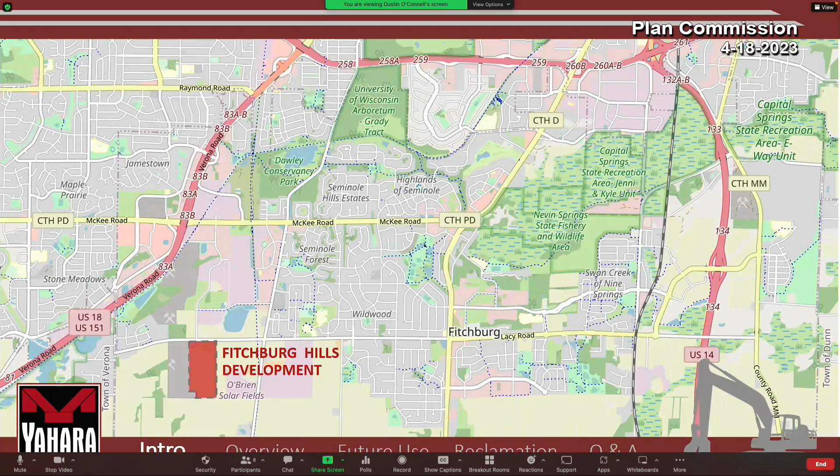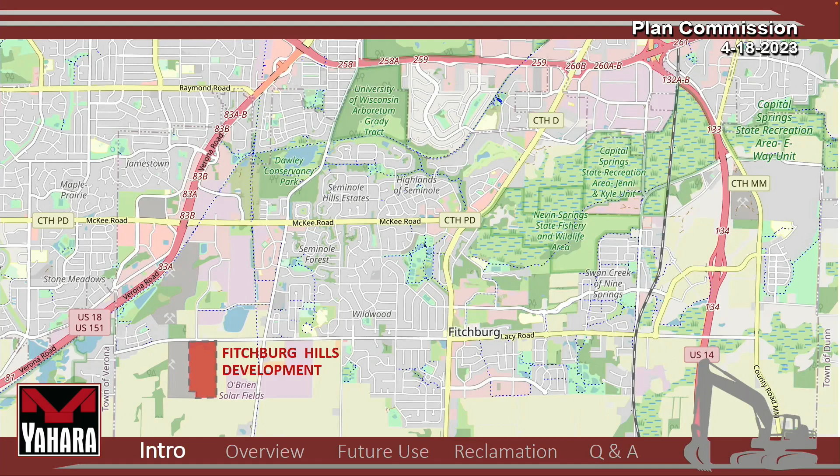This is the location of our site, Fitchburg Hills Development. It's next to the O'Brien Solar Fields, on the south side of Lacy Road, located at the intersection of Commerce Park Drive and Lacy Road, directly south of the Hop House. It's the old Richardson farm, consisting of just under 100 acres. It's currently zoned for agricultural row crops, the predominant use, and we purchased it in 2021.

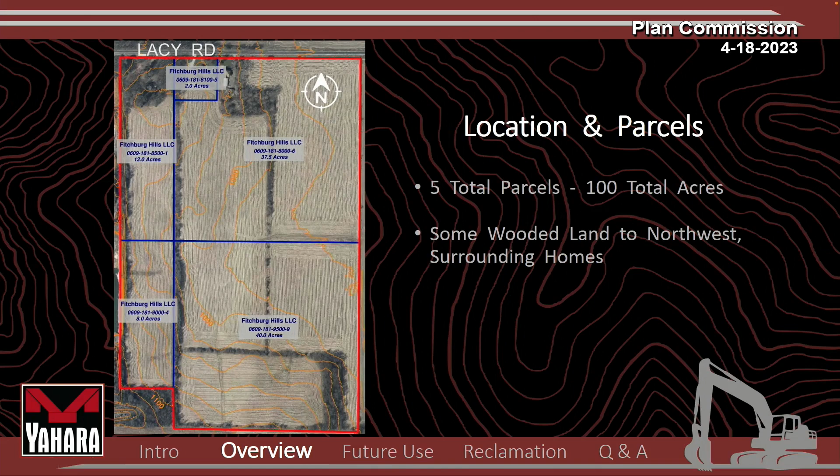Again, here are the 5 parcels that it includes. We're currently in the stages of putting our reclamation plan together, as we know the site is going to get developed in the near future. Fitchburg is updating their comprehensive plan for the South Stoner Prairie neighborhood, which includes this site.

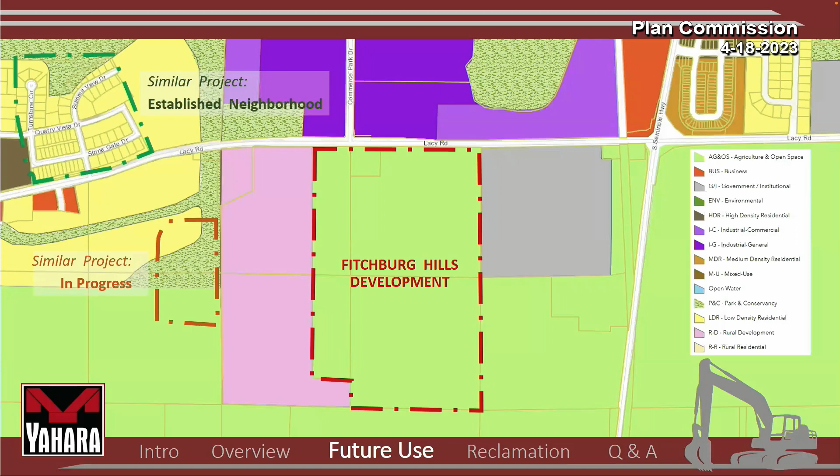When a development happens there, go to the next slide. Again, this is another slide of the site. We had to put a reclamation plan together for what we're going to do in the interim. This allows us to go in and start prepping the site, because the rock is going to have to be dealt with regardless of what happens here. This gives us an opportunity to remove the rock so the future development can move along.

This is an overview of the steps of our process for processing rock. We've done our investigations, we've got our plans drawn up, and right now we're in the process of getting our conditional use permit. Once that happens, our operation will be clearing and grubbing it, putting in erosion control, stripping it, drilling and blasting to prepare the rock. We'll process the rock, crush it and screen it. When we're done, we'll close it out, clean up the site, recycle it, reclaim it, and put it back to agricultural vegetation.

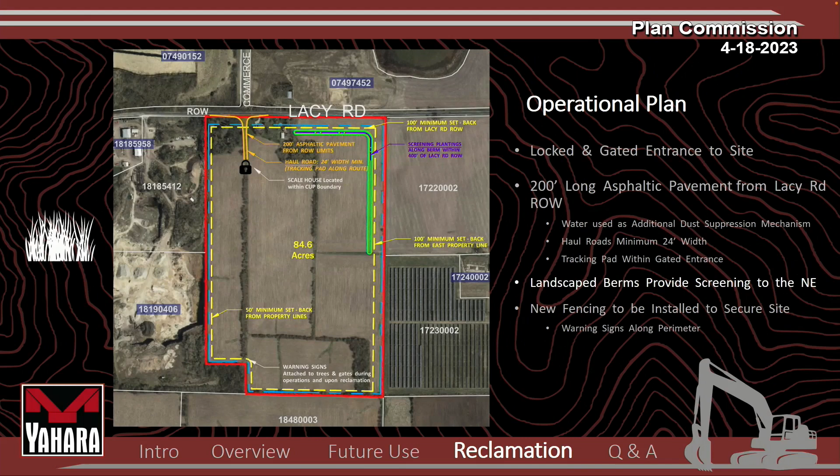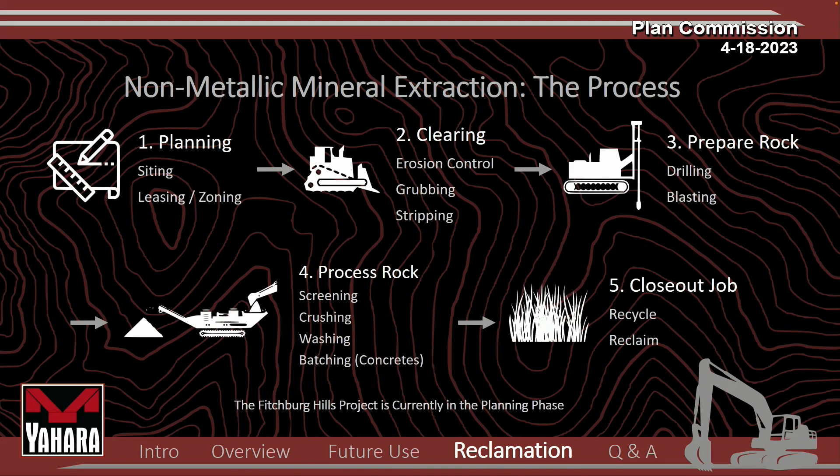Can I ask a question real quick? Sure. On one of your last slides, condition number 17 says no washing of materials, recycling materials, asphalt batching, concrete production, and concrete mixing shall be performed on site. Are you saying you have an intention to do that on this site? No. We have no intentions of washing or batching or producing asphalt, anything like that. We're just producing rock. Just wanted to make sure we weren't in conflict there. Thank you. Yep.

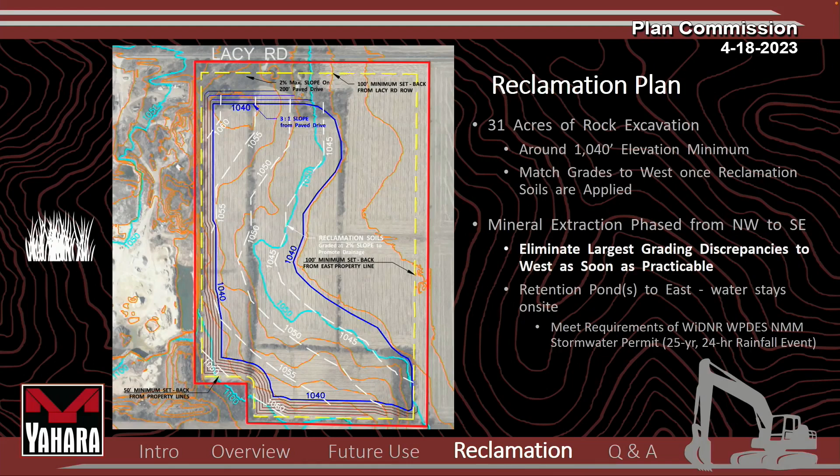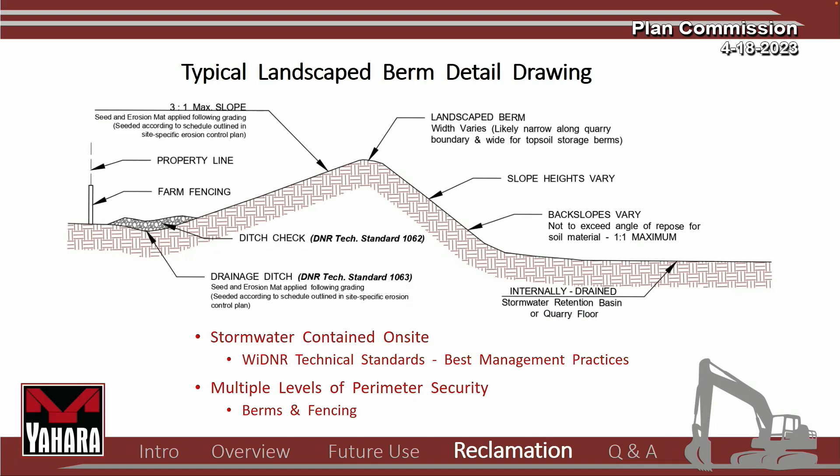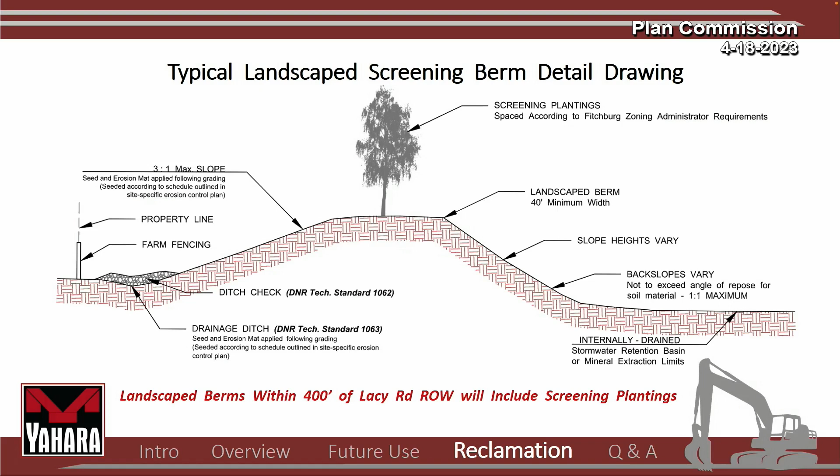Here is what our berms are going to look like: fence, security fence, ditch check, seeded matted berm. This is a slide of what the typical landscape screening berm will look like. The only difference is it's going to have some trees on it, and that will be on the north and east side, approximately half the distance on the east side. Here's a cross-section of our high wall, the safety fence, and the berm.

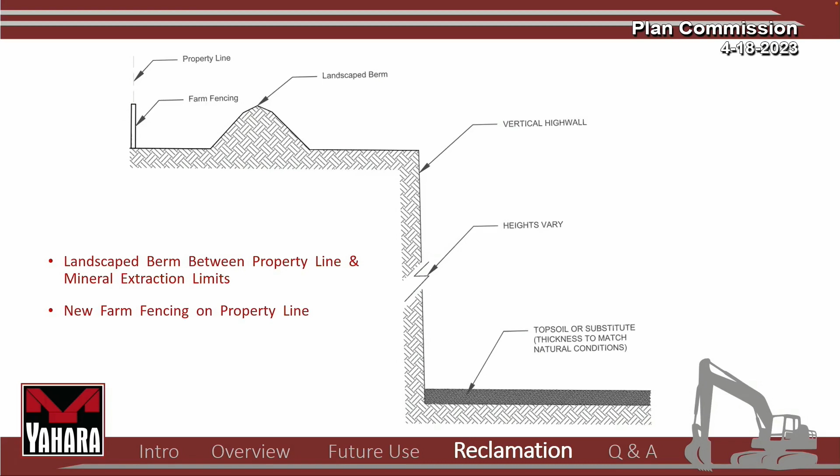Going forward, the only thing we have left to do is, if we get your approval tonight, submit our completed reclamation plan to Dane County, and they have 30 to 90 days to approve that.

In the meantime, for stormwater management we have to apply for a permit from the Department of Natural Resources. That plan will show where all the water's going to be caught in the ponds, and it will be determined that it's an internally drained site. They will monitor that and issue us that permit, and you guys will get a copy of it.

This is a scenario of the haul routes when we first looked at this. The green going to the west and up Fitchrona Road is on there for visual purposes only—we've never intended to go that route. The two routes we looked at were going north on Commerce and east on Lacy.

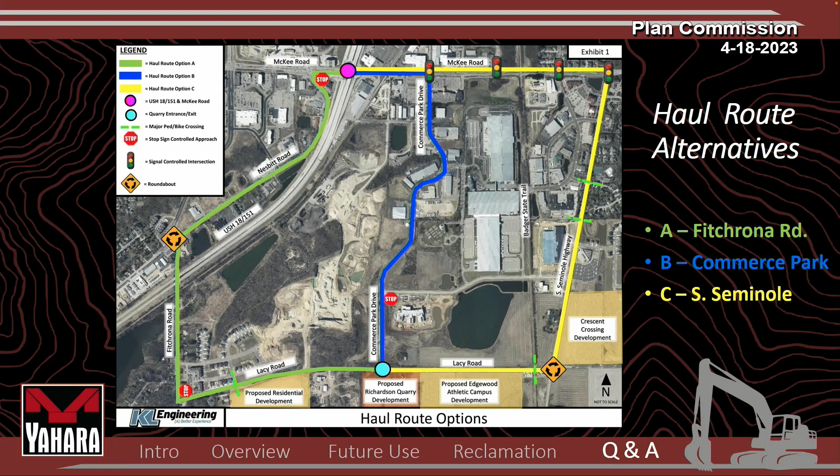In discussion tonight with the Rural and Ag Affairs Committee, it was brought up that they would like to possibly see a four-corner stop, a four-way stop, so we would continue north on Commerce Drive all the way to PD, and we're okay with that. That was an option brought up tonight. This is some of the criteria used when the traffic routes were looked at and decided upon.

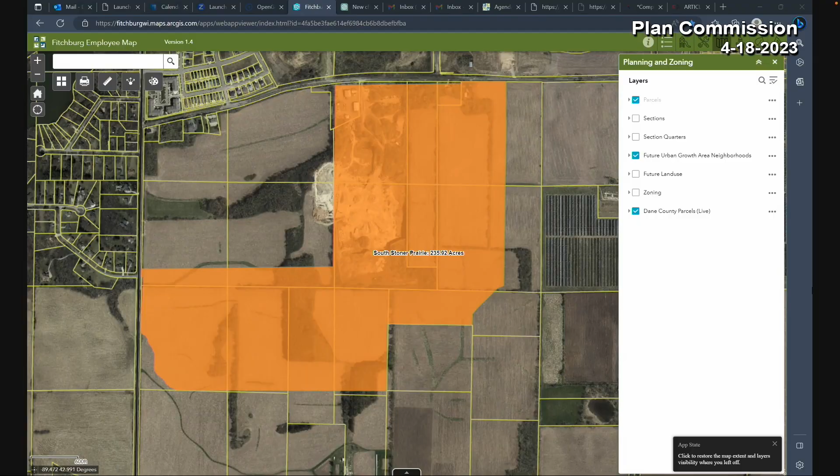But planning staff have initiated the South Stoner Neighborhood Plan. The area in that orangey color, might look a little yellow to some of you, is the South Stoner Neighborhood Plan that staff has initiated the process to begin. We have selected a consultant and will go into contract in the next month or month and a half, we hope, and then start the neighborhood planning process within 2 or 3 months.

So while the future land use currently on this site is agriculture and open space, at the completion of the South Stoner Neighborhood Plan this will have new land uses, and this will be the first step for urban development throughout this orange area. To orient you, Fitchburg Road is here, Lacy is up here, and the parcels for the proposed quarry are these parcels, if you can follow my cursor.

So these parcels, where this current application for conditional use is slated for urban development, at this point we cannot tell you what types of urban development it will be. We can't say if it's going to be houses or industry or commercial. That will come out of the process of the neighborhood planning process we are embarking on, and I would expect it would take at least a year till we have that neighborhood plan ready for Plan Commission review and council review. So that's the first step I wanted to bring out for everyone.

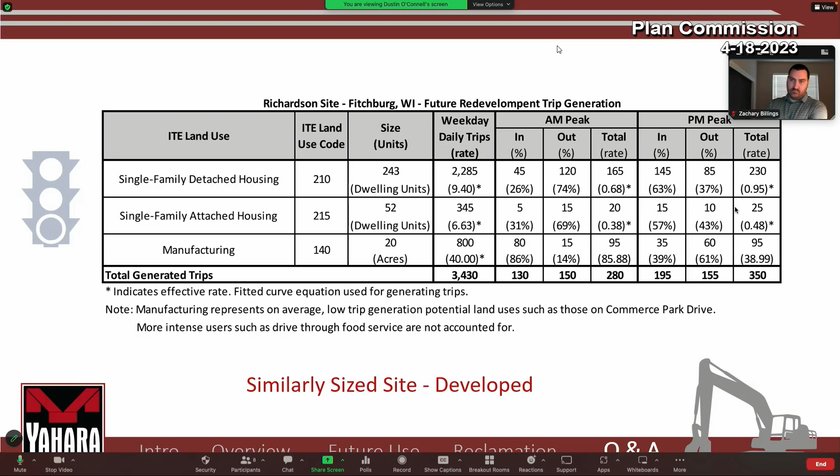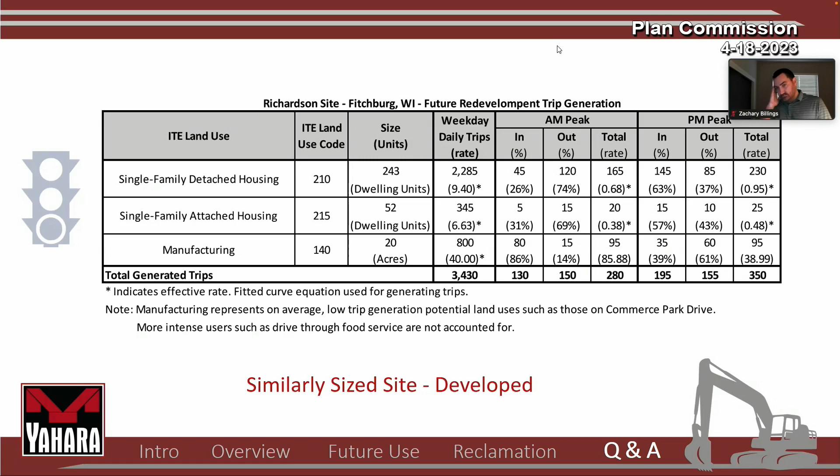As a follow-up, at what point would we expect the truck hauling to reach the level that generates the warrant criteria to put in a four-way stop? It quite frankly is far short of that. We did some forecasting of future development, assuming if it's mostly residential with some commercial, potentially along Lacy Road, that was shown to generate about 3,500 vehicles a day - at that level you'd look at a traffic signal. What the quarry is showing, with 150,000 tons per year production, was about 70 trucks per day, which on an hourly basis is less than 10 in an hour. Not insignificant, but far short of the levels traffic engineers would say meet the need for a four-way stop.

You would need, just kind of high level estimating, but you'd need probably 10 to 15 times more volume regularly using that intersection, either from Commerce Park or the driveway or both, than the quarry's going to generate to really necessitate putting stop signs up for Lacy Road.

And what point were the trucks, you have to prepare the site and build the berms, so would you potentially start hauling at the end of this calendar year, or would it be next year? What's the timeline for the trucks to actually be on Lacy Road? Probably late this fall. The construction's happening this summer.

I have a few more questions, but on different topics. Any other questions? No? I just have a couple things about the geological report, just a few questions about groundwater and stormwater.

So the St. Peter sandstone is underneath, and you're looking at the dolomite layer, that's what you're trying to mine. You say the layers are pretty flat in the area, so you have a sense of how deep you get to go. But at the 1,040 layer, looking at your cross-section, it looks like the sandstone actually starts at 1,060.

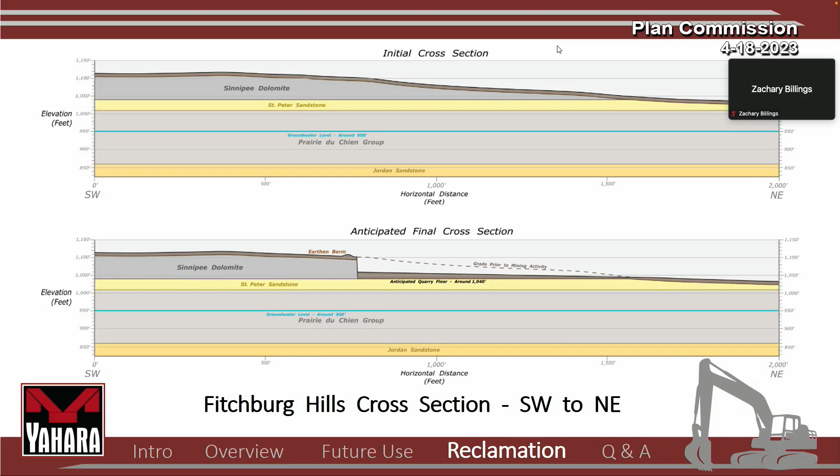Obviously the water table is lower, about 50 feet lower, but the actual sandstone layer starts about 20 feet below your minimum. In terms of protecting the groundwater, the report says it's 90 feet of depth before you hit the groundwater, but in reality it's 20 feet of depth before you hit the sandstone, and that's the risk, in my mind, of groundwater contamination. So I'm curious about how you manage that.

Or potential groundwater contamination. Can you come to the microphone? Dustin, you want to take care of that? Yeah, sure. All right, so I definitely understand the concern there.

The big thing to emphasize, and we've already touched on it a little bit, is there will be no washing going on at the site, and there will be no high-capacity wells. The types of activities that would influence the groundwater table would be drawing from the groundwater table with a high-capacity well, or washing materials on site and depositing those in a pond that would have water infiltrate once you have processed water. So again, just to reassure everyone, those activities aren't taking place, and those are the activities that would influence the groundwater table.

So the activities are purely mechanical in nature. You're crushing the rock, you're putting it on the trucks. Are there chemicals? There has to be. No, there's no water incorporated at all, other than the storm water that would be falling on the material, which will remain on site. There's no process-generated wastewaters associated with these activities for this proposed project.

And then the other question I had was about dust and sediment in general. I know it mentioned in the report, in the materials, that you do some street cleaning if there's any sediment at the end of the day. You want to touch on that, Robin? I'm sorry, I didn't hear the question. So for erosion control, I saw on page 8 of your report, it said something to the effect of any sediment reaching the street will be cleaned up daily by street cleaning.

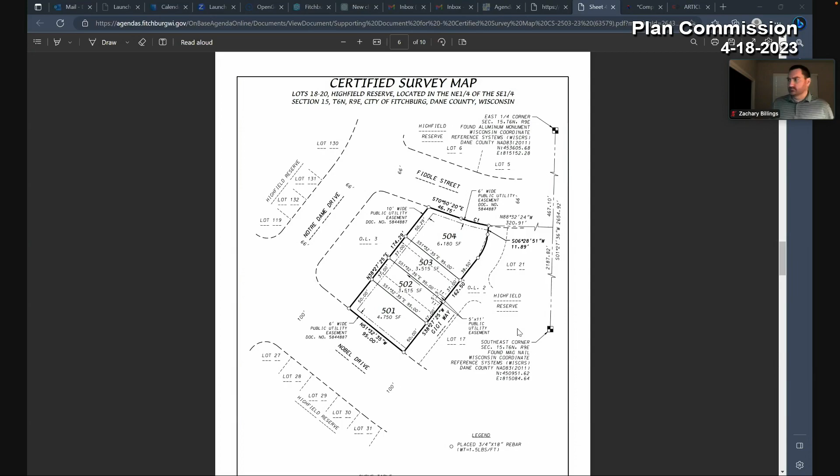Staff is recommending approval of the certified survey map with 7 conditions, and we're recommending approval of the minor comp plan amendment or modification request without any conditions. Okay, thank you. Any questions?

So can we move the motion? I'll move approval of certified survey map CSM 2503-23 with the 7 conditions laid out by staff. I need a second. Second. Any questions? No? Okay, all those in favor of approving the certified survey map CSM 2503-23, say aye. Aye. Any opposed? The motion carries.

We need to do 5F now. We need another motion for the minor PDD. I'll move approval of the minor PDD modification request, Highfield Reserve lots 18 through 20. I'll second. Any questions? So all those in favor of approving the minor PDD modification request, say aye. Aye. Any nays? Okay, motion carries. Thank you very much.

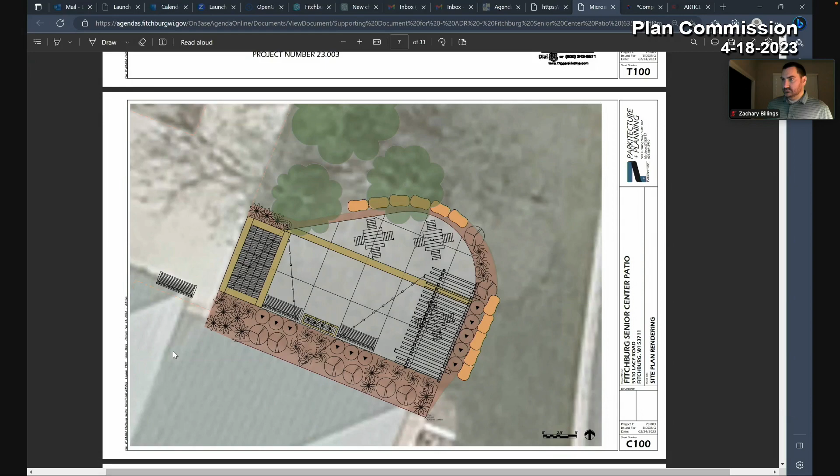Thanks, we're just supposed to make sure that you're using good quality materials. Of course, that's what it said in the staff report. Nothing but the best, since it passed through the Fitchburg Center. Unless you don't raise all the money, then it's all going to be plastic. No, they wouldn't let me. I was just going to pour a slab, and I got a quick halt because it had to be a little bit nicer than that. It's going to be beautiful. We've got some beautiful renderings down at the Senior Center if you want to come and see them.

So. Thank you. Okay, so.

The current zoning is BG. Staff does not see any issues with the zoning, and it's consistent with the future land use and the comprehensive plan. The applicant has provided pictures of the different pieces and parts. Staff also notes B-cycle docks will be included nearby at this site, and that'll be coordinated in the future. Staff recommends approval of this ADR with 4 conditions.

Any questions? I'll move approval of ADR for Fitchburg Senior Center patio with the 4 conditions as noted. I'll second. All those in favor of ADR for the Fitchburg Senior Center, say aye. Aye. Any opposed? The motion carries.

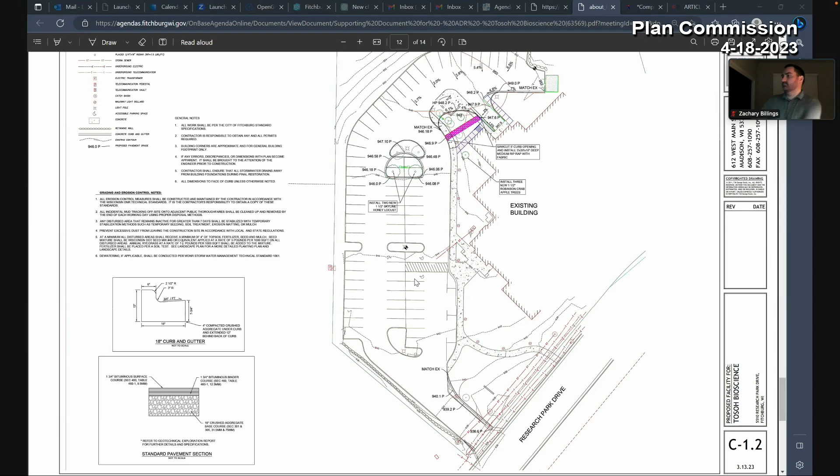So the primary impact of the change in the site design is a reduction in the parking stalls from 111 stalls to 86, equaling a total loss of 25 stalls. However, the tenant has a need of 45 stalls, and Tosoh maintains that they only have 20 employees. So the applicant believes that there still will be sufficient parking on site to meet the needs.

The applicants have stated an intention to not disturb or alter the northernmost portion of the parking lot design, and maintaining all of the existing vegetation and trees as much as possible. Any of the landscaping that would need to be replaced or removed would have to be replaced.

There are some slight alterations to the facade materials, including a replacement of a garage door and a new dumpster enclosure. We have requested that the applicants repair or replace the garage door with similar kinds of materials, and that the dumpster enclosure be rebuilt to match the facade materials with stone or brick kind of materials. So construction is proposed to start in the summer and end in the fall of this year. Staff recommends approval with a total of 10 conditions.

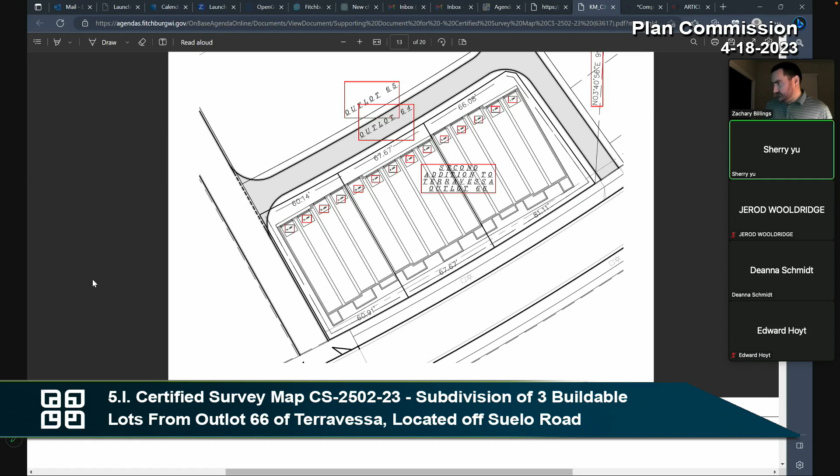Thanks. Any other questions? No? Okay, I'll move to approve CS 2502-23 with the 9 conditions as noted by staff. Second. Any additional questions? Nope, okay. So all those in favor of the certified survey map CS-2502-23, say aye. Aye. Aye. Any opposed? No. Okay, the motion carries. Thank you.

So next we move to 5J. This is another ADR. And we do have Ned on the line. If you would like to speak, otherwise, Ned, I can just take this one.

I'm happy to answer questions, but I assumed I would just be here to observe. Okay, thank you, very good. And good morning from Australia. Good morning, good morning.

This is actually an ADR that was approved back in November, I think. Back in November, Plan Commission approved this ADR as part of the PDD SIP for the Avalon. What happened is that when the building permits came through for our review, for the zoning permit, there were some changes in the architectural design and materials that staff is not comfortable making a final call on. So this is coming back to Plan Commission for approval. When there are minor changes to an ADR, the code gives us a little latitude on the staff side to make calls, but this one's a bit more significant in changes, so it's coming back to Plan Commission.

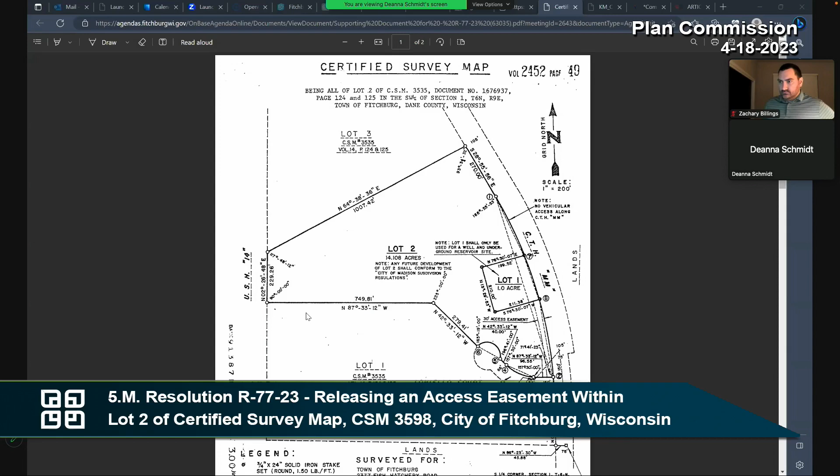Oh, darn it, let me get this up on my screen. I'm going to get there. Okay. Lot 3, 2, and Lot 1 here are part of the proposed preliminary plat for Nine Springs with Royal Capital, and these lots would, of course, be removed, will go away once the final plat is approved. So this is some cleanup.

There is existing on Lot 1 a utility easement for a former well. Way back in the day, Lot 1 was proposed to be a city well, and maybe you remember that, Ed. And for a time, the city actually owned Lot 1, but Lot 1 has been sold back to the current owner, Jim Fosside, but yet this easement is still hanging out there. So item N is going to release that utility easement for the well, and item M will release this 30-foot access easement. This access easement was granted to the city to access the potential future well off of Laniello Court. So items M and N just release these old easements that are not really needed anymore since the city's not putting a well there. That's all I got.

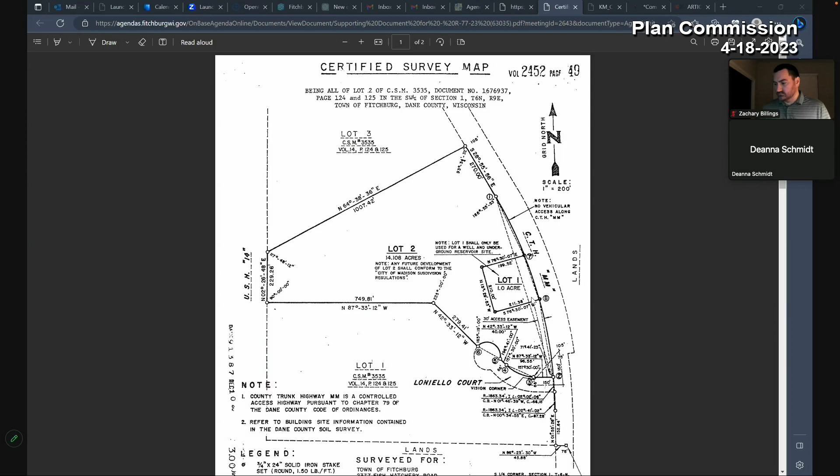So my question is, does the city own that lot? No. Lot 1, for a time, the city did own it, but I think it was quite a while ago. The city did sell it, the current owner is Jim Fosside. So, and he's okay with this? Yeah, he intends to sell the property for the development that's coming up. So, yes, he is just fine with it.

These two easements were granted to the city for the city's purposes of a well that is never going to be built. Maybe I didn't say that very clearly before, but they're just easements that were granted to the city, and the city has no purpose for these easements. And then when Royal Capital purchases that land, this lot is going to belong to them. It will, yes. And if we don't release this easement, it would kind of be a cloud on their title. Oh, okay, that kind of makes sense.

So staff is asking for a motion to approve Resolution R-77-23, and then a second motion to approve R-78-23. Can we do them both at the same time? We'll need them separate, sorry, Rich. So moved, approval of Resolution R-77-23. Second. Any other question? All those in favor of Resolution R-77-23 say aye. Aye. Any opposed? The motion carries. So the second.

I'll move to approve Resolution R-78-23. I'll second. Any questions? All those in favor of Resolution R-78-23 say aye. Aye. Any opposed? The motion carries.